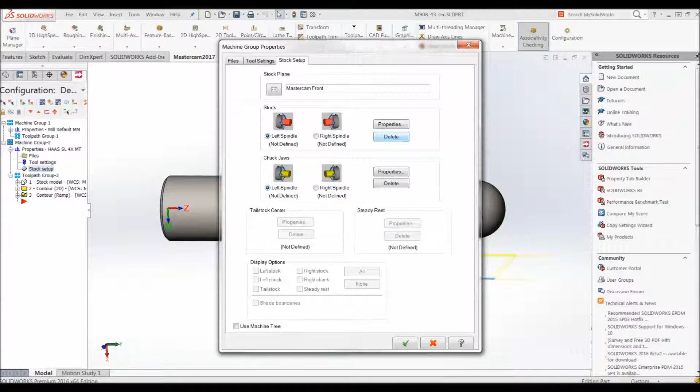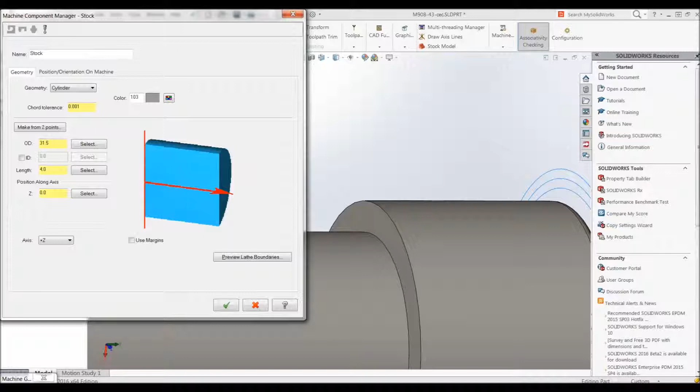I do want to make sure though that my stock setup is defined correctly, and also chuck jaws if I have any. So before I get into anything, I'm just going to grab a cylinder, and I think I might have some inch to metric issues doing this here, but let's see if I can just select this diameter and get lucky. And so 31 millimeters with a length. I'm not sure how well that works, but I guess I'm just going to have to approximate this length.

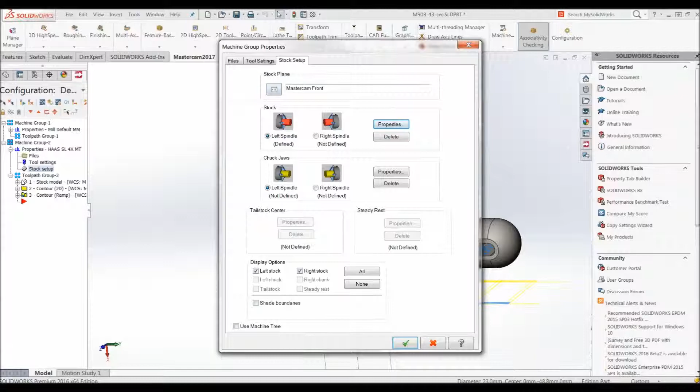So my plane seems wrong. So there's a little bit of figuring out as far as getting the stock to fit in the right location. My issue comes from this Mastercam front plane being my stock plane. I'm going to grab our plane that we made before. And let's try that again. So cylinder, 31.5. So now you can see this gray outline showed up where it looks a little bit more like my part.

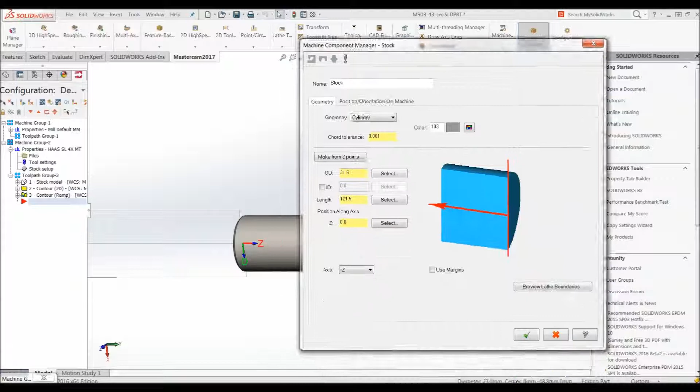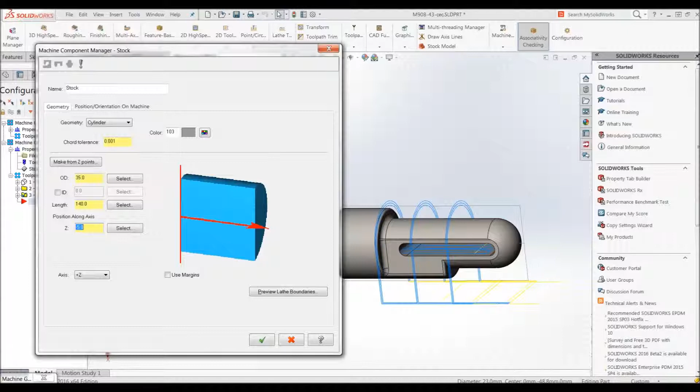Okay, so it's starting at my Z0, so I want it to go positive Z, and you can basically set your length to whatever works here. Okay, so my length goes over the end of the part. My diameter I'll even beef up to say 35 millimeters, and at the same time, I'll have it start at -5 or something like that, just so that my whole part is enveloped in stock. It really depends on how you're going to process this.

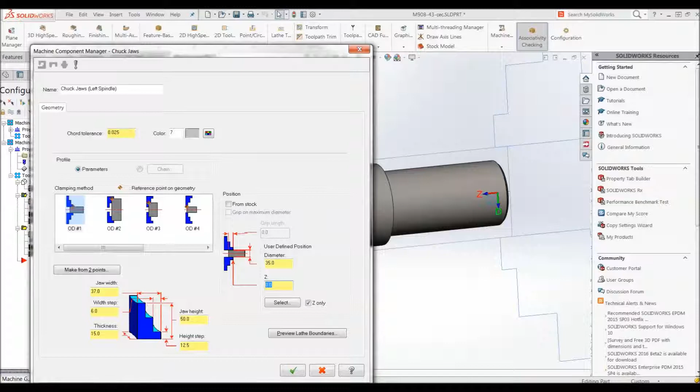So now I've defined my stock, and I'm going to define some chuck jaws, basically filling out these dimensions to match, so 35 millimeters diameter, and I'm going to grab the part at say Z 40 millimeters. And so you see a live preview of where our chuck jaws go, just for verifying against. And just remember that plane has to be the same plane that we create, that makes sense for a turning machine.

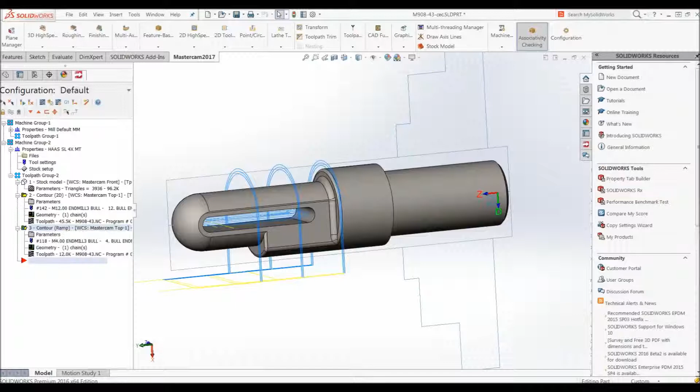So now I'm going to grab a lathe toolpath, pick a roughing toolpath. So I'm going to select a solid body here, and below this in Mastercam we have chaining options, where I actually want to take this model and spin it, so I can create a turn profile by spinning this part. We could also take a slice through it, but if we took a slice through this part, the profile it creates might not be perfectly correct.

You can tell it to ignore individual faces, ignore a back face. We want to make just the upper profile. And so what it means by upper profile, you'll see here. So this is the upper profile. By telling it to ignore the back face, we told it to ignore the vertical line here. But obviously, we aren't going to be able to turn all of this in one setup. So what we can do is we can take the endpoint and move it back. So now we can just run a roughing operation up to this point.

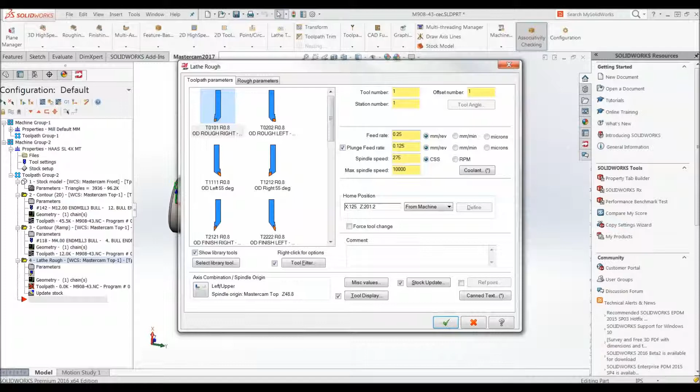So I'm going to check this, grab a roughing tool. As far as lathe tools go, there's lots of possibilities, but I'm just going to run through and just pick some default cutters. And I'm not exactly very good with lathe feeds and speeds, let alone metric lathe feeds and speeds, so I'm just going to leave these as they are for now. So we have some options for taking depth cuts and roughing. So say, 1 millimeter max depth cut.

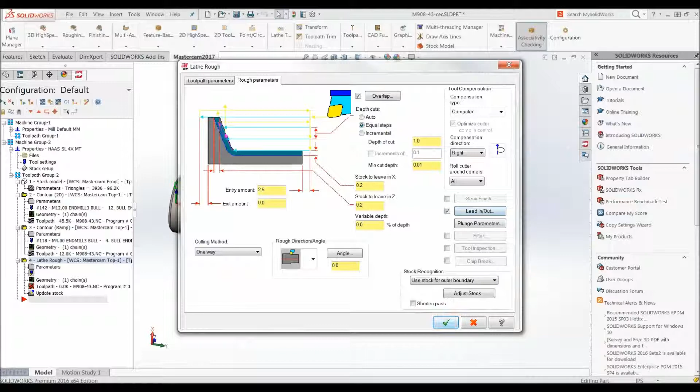Stock to leave, an extension for the exit and entry. We want to tell it that it's an OD. So here's the OD, ID, front face, back face. I want to use my stock for my outer boundary, so that's just telling it I'm roughing out using my stock. So let's just go with this quick. So you can see it generates a pass.

So my roughing depths might have been a little bit light, but it shows what the roughing pass does. So with back plot, it looks pretty good. However, well, it looks like I'm okay. My cutter stopped at this face, and I do want it to go a little bit farther, but without touching these jaws. So there's a couple things I can do.

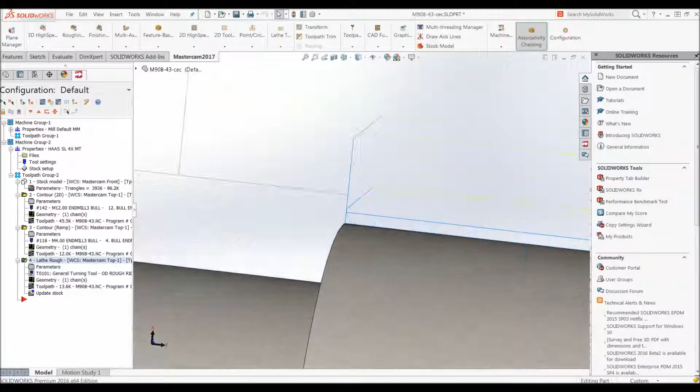I can give it an exit amount, say 3 millimeters. Maybe it was a lead out actually that I want to do. Once it's done generating, you can see that exit amount actually was a vertical direction. So let's go back to 0 there. The lead in, lead out was what I want to do. So for lead out, I want to extend the end of my contour by 3 millimeters.

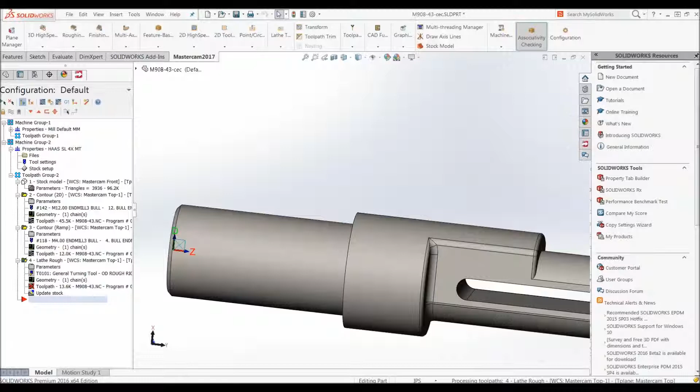So now you can see our stock's live preview ended up at the end of the part. So now when we flip this part over and turn the backside, we will have a nice clean face to cut up to.

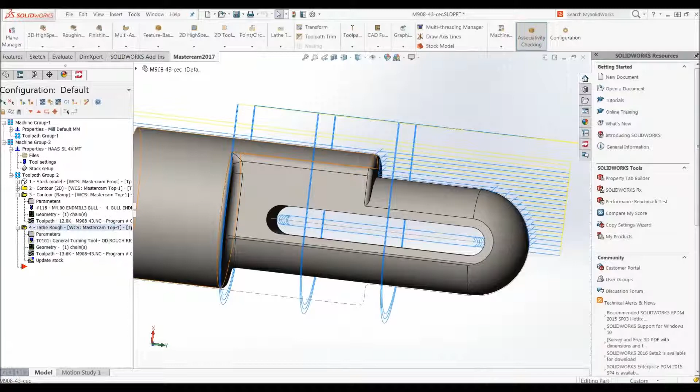And what I'm going to do next is I'll just do the same kind of process with a finish pass. So I'll grab the finish cutter or a finish toolpath, select this body, tell it to ignore the back, spinning profile, upper profile.

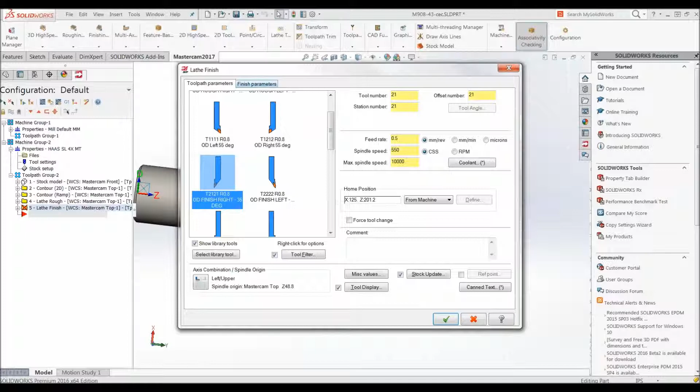Same thing, move my endpoint back. Grab a finish cutter, so there's a different cutter for the finish passes. We can basically have it take multiple finish passes if that's the case you want. Leave 0 stock.

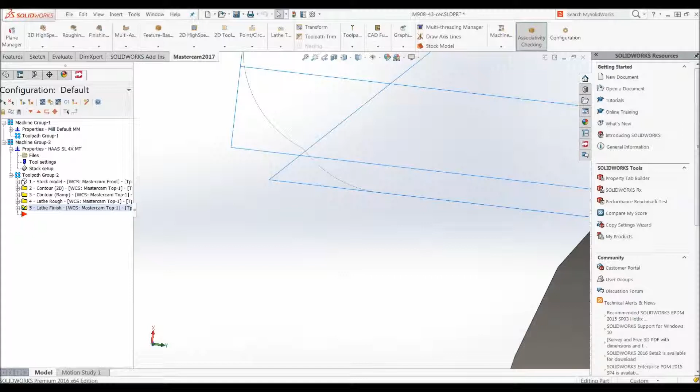And now you can see actually our live preview shows the cusp where our finish cutter ended up. So if I just backplot through this, backplot through that, you can see a nice predictable result there.

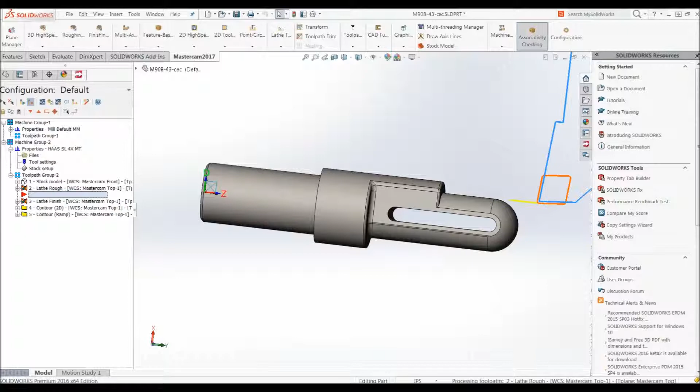So what I want to do next is actually move these operations up before my milling ops, which makes them dirty for some reason, but doesn't affect them. I'll just regenerate, so regenerate the rough, regenerate the finish.

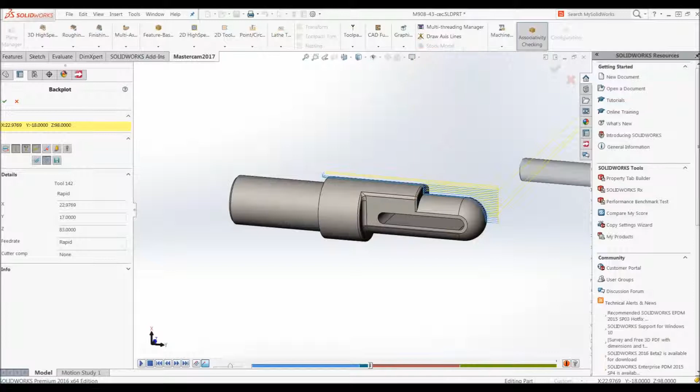I should have just honestly made my toolpath start up there. So now that I've put those operations back up top here, if I just wanted to backplot through this whole process, you can kind of see I'm going to rough. Finish pass is a nice quick little finish pass. Goes into my milling and my depth cuts. Contour ramp.

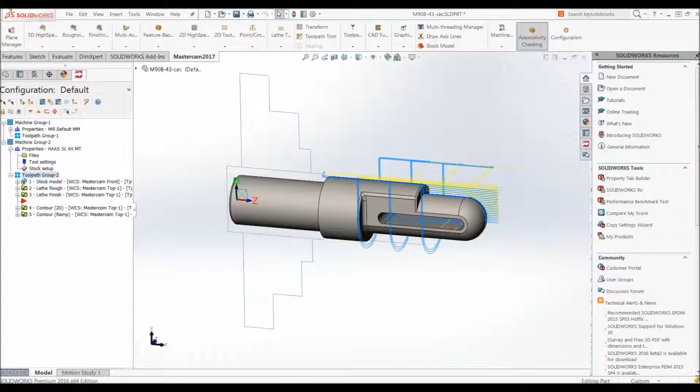So I believe I'm ready to post this out. Obviously there's going to be little toolpaths you want to add in probably for cleaning up some corner radii or things like that, but the process is here. So I'm going to click post.

So one issue I have here is my machine definition was actually not navigating to the correct folder for post processor. So what I'm going to do is, you want to check inside of your public documents, shared Mastercam for SolidWorks 2017, lathe posts. These are the post processors that I currently have access to. You may have a post that is better suited for your machine.

Here I'm just going to assume it's a Haas SL 4-axis lathe post. Just give it a place to save the NC file to. Just save it to my desktop.

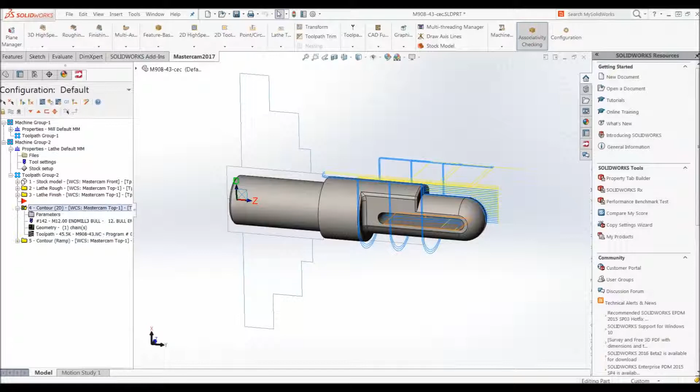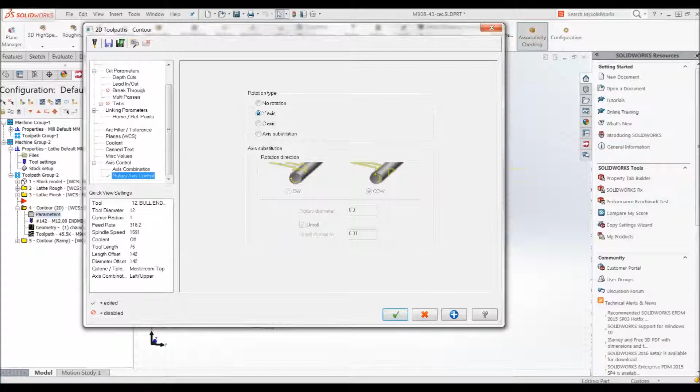So those errors I was getting, I believe, were actually caused by my settings in here. It is important to tell the machine that it is a y-axis lathe. So I'm just going to make sure those are set to reflect the y-axis.

So those ops are still good, so let's try to post out all that once more. There we go, so no errors that time. So what we were doing was we were telling the machine that it was supposed to mill all this, but without using the y-axis, which is impossible.

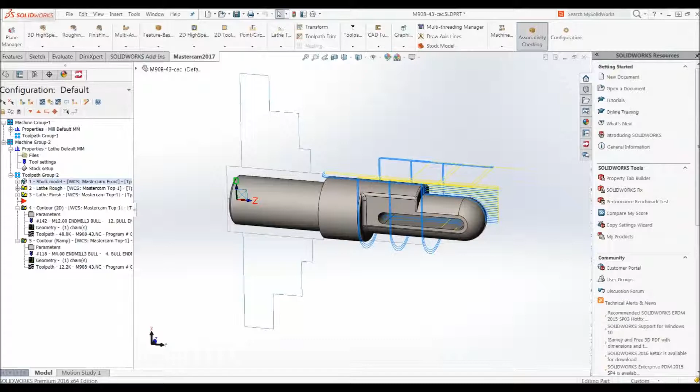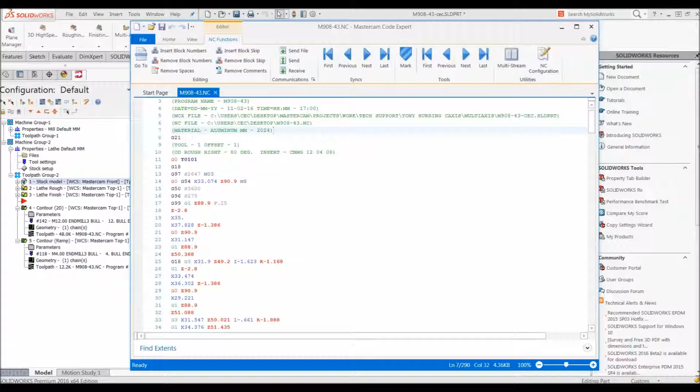So there's your posted code. Just make sure you have all our tools in here. So there's tool 1, so there's our bullnose end mill. And our smaller end mill for cutting the ramp.